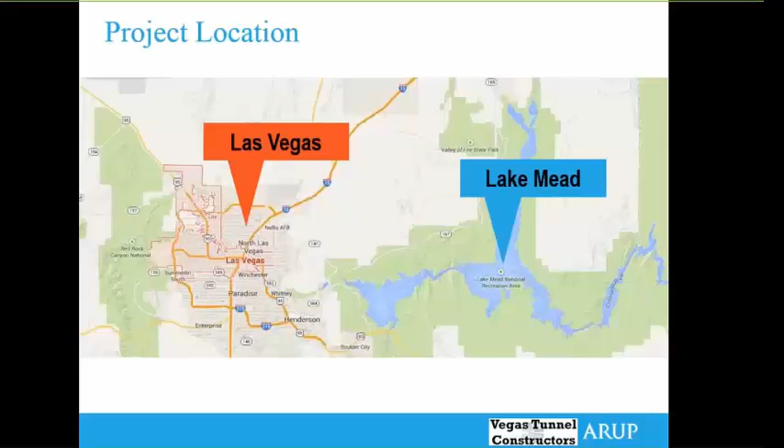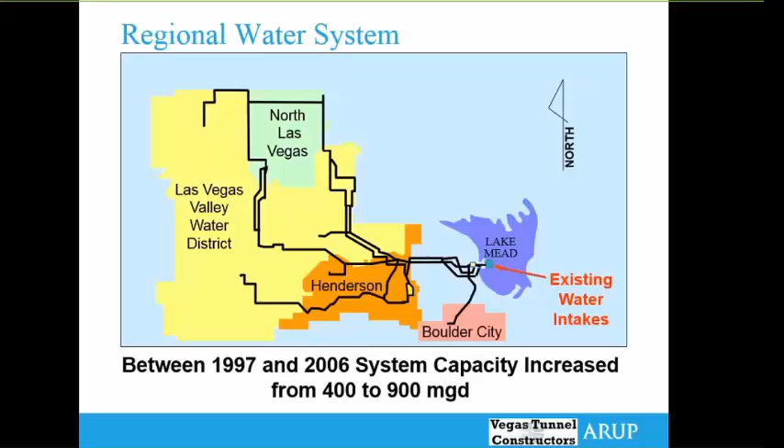Lake Mead is located approximately 35 miles directly to the east of Las Vegas and provides basically all of the water that's used in Las Vegas for drinking water, irrigation, and so forth. The amount of people serviced by SNWA has grown exponentially, and so has the water usage over the years. Between 1997 and 2006, the system capacity more than doubled by the addition of another intake on Lake Mead to deliver water to the treatment plant and into their distribution system.

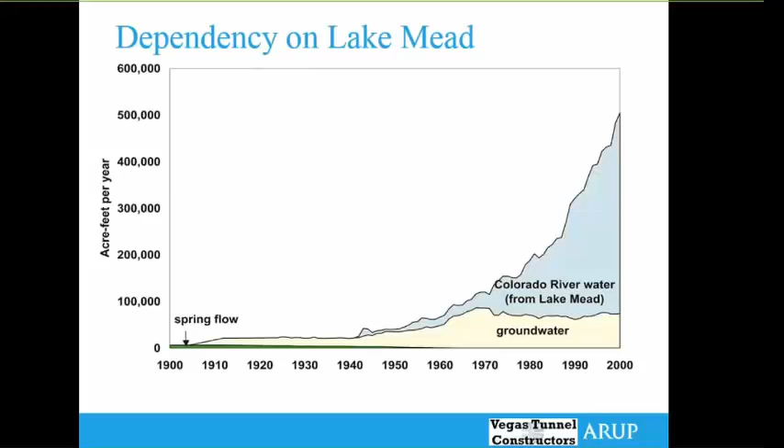This graph shows, over the last 100 years, the dependency on Lake Mead by the city of Las Vegas. Originally, Las Vegas was supported primarily by spring flows and groundwater. However, around 1950, the amount of water provided to Las Vegas by Lake Mead grew tremendously, as you can see in this graph.

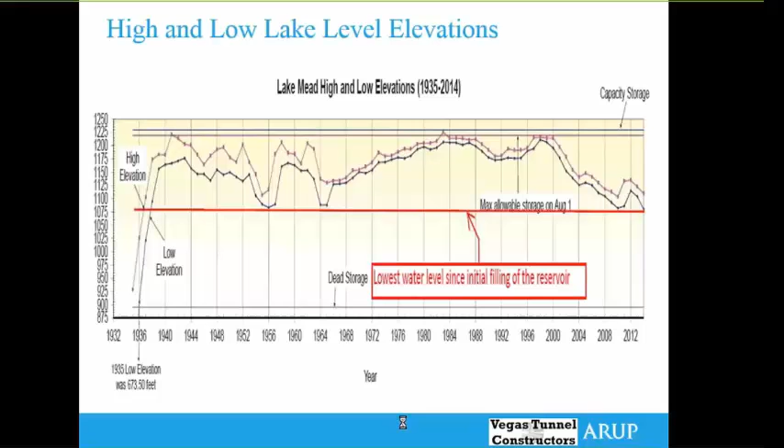So it was a dramatic look forward that SNWA had to come to terms with — the idea that lower lake levels could affect their water intake supply.

Essentially, Lake Mead has two existing intakes. One of them is located at about elevation 1050. What happens is as the lake level drops, you can't continue to utilize your intakes if they're within a certain elevation of the surface, because the amount of debris and material in the top layer becomes prohibitive to actually treat and put into your delivery system.

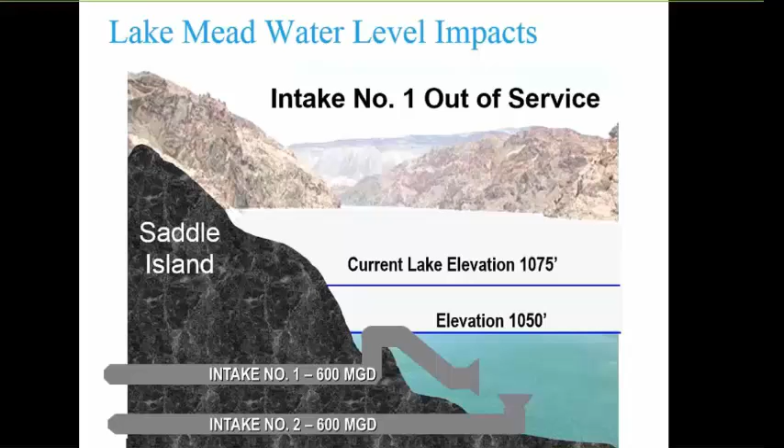Currently, the lake level is at 1075. However, if that were to drop another 25 feet, intake 1 would become out of service, essentially cutting in half the amount of water that SNWA is able to take out of the lake. Another 50 feet beyond that, intake 2 would then go out of service, and the city of Las Vegas would have to resort to very dire measures.

So considering that the lake had already dropped 100 feet by the time this project was initially conceptualized, this was a very realistic look forward, and the Lake Mead Intake No. 3 project was born.

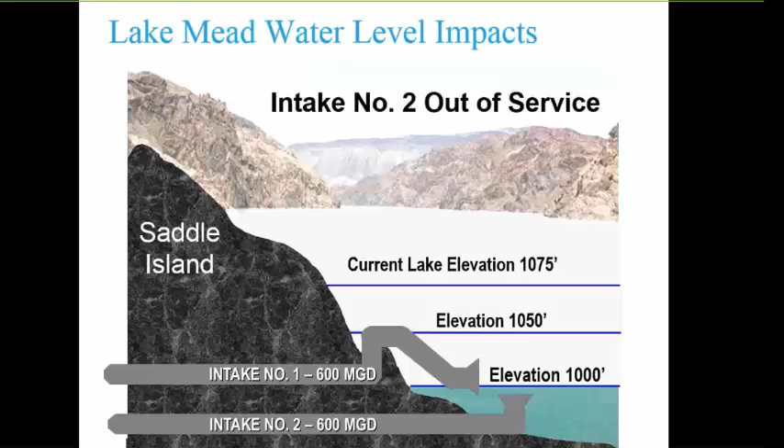The idea behind Lake Mead Intake No. 3 was to add a third intake to the lake at a much deeper elevation, around 860, at one of the deepest locations in the lake.

Not only would this provide long-term solutions to Las Vegas's water resiliency, but putting the intake at the deepest part of the lake means the water quality is higher in these locations, and it would require less water treatment.

The overall objectives of this project are to protect the system capacity, access better quality water at the deeper part of the lake, and prepare for inevitable future drought cycles.

I think we have come to the conclusion that this is not an isolated event, but that we need to look forward to the future and be able to design for these types of things to occur in the future.

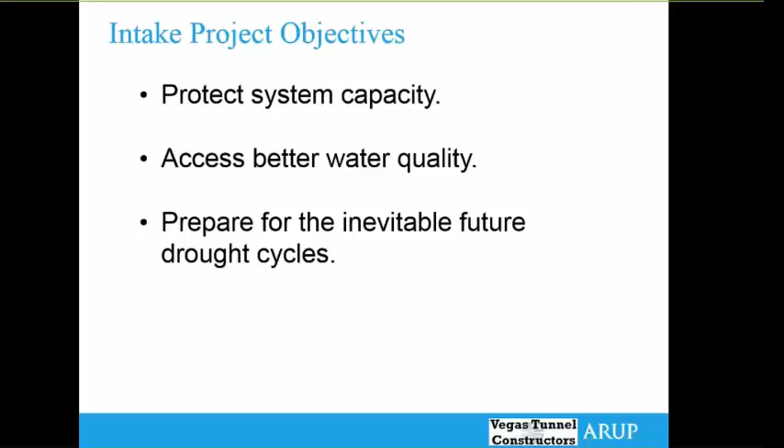The bidding process was a design-build, where qualified firms were first shortlisted, and then final bids were put in and presented, with the combined technical score of managerial experience and price coming together to determine the best offer.

As a design-build, the contract did allow for refinements of the shaft and assembly cavern, the tunnel alignment, segmental lining design, and the final intake connection.

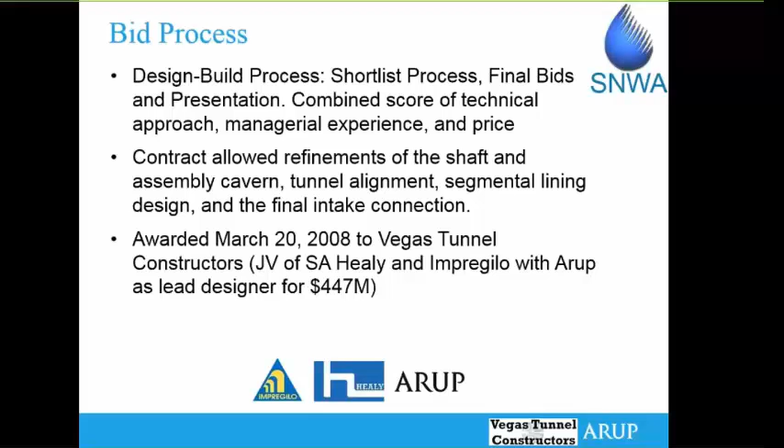In March of 2008, Vegas Tunnel Constructors was successfully awarded the design and construction for a contract price of $447 million. So what I'm going to do is talk a bit about the optimizations that were done as part of the design-build project and get into some of the key aspects.

Initially the project starts with an onshore shaft, which is 30-foot diameter and 600 feet deep, where at the bottom you construct an assembly chamber for the TBM and you launch the TBM out of a starter tunnel.

Then you follow that with a 3-mile, 20-foot internal diameter tunnel that has to be excavated underneath the lake, so that the water pressures on the TBM were up to 15 bars working. At the end of the project, you have to hit a 100-foot tall precast intake structure sunk on the bottom of the lake.

So all in all, a pretty challenging project, pushing the limits of TBM technology and engineering design.

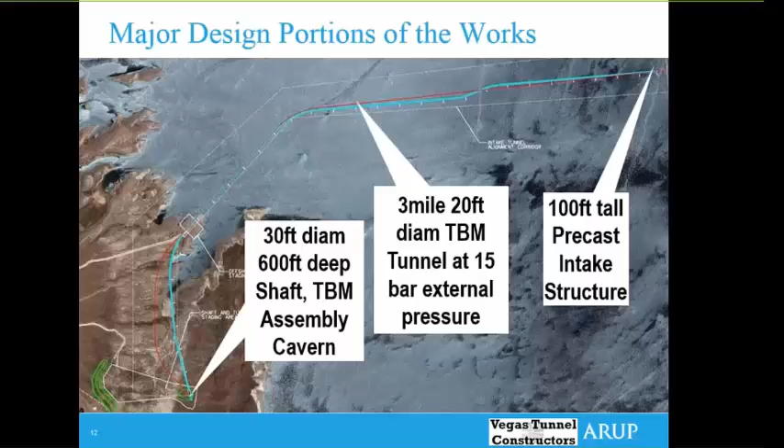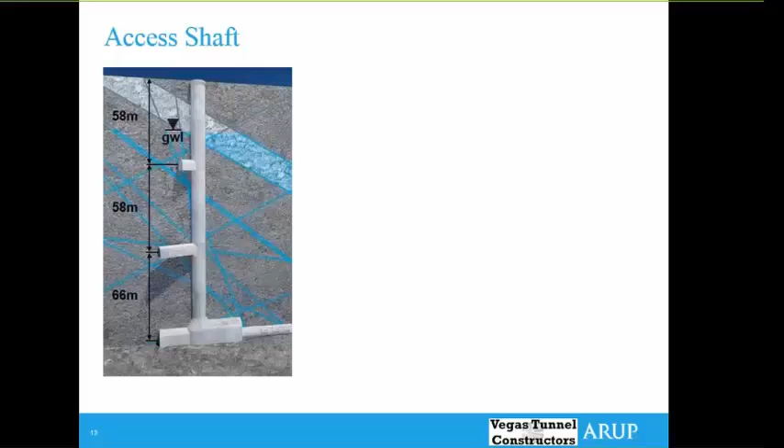So the access shaft, like I mentioned, was about 600 feet deep, and it consists of a couple of different portions: the access shaft itself, a temporary niche tunnel about 150 feet down, and then a secondary connection to the intake pump station 3 that would connect to the rest of the system there.

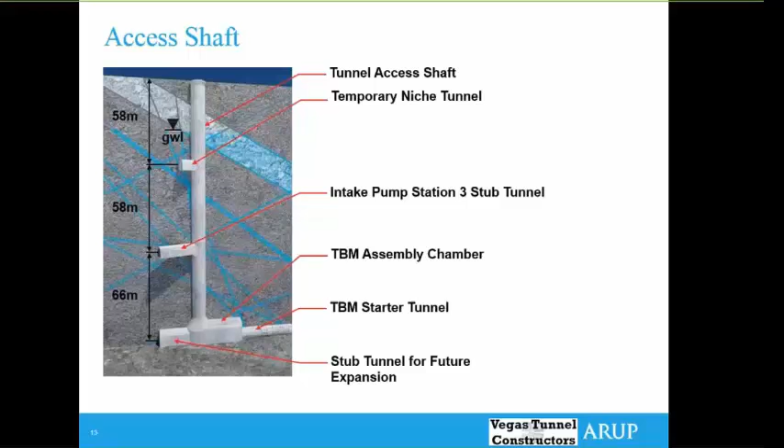The TBM assembly chamber at the base, with the starter tunnel and stub tunnel for future expansion if necessary. So one of the things that we looked at was the geology of the area, which was primarily fairly good rock.

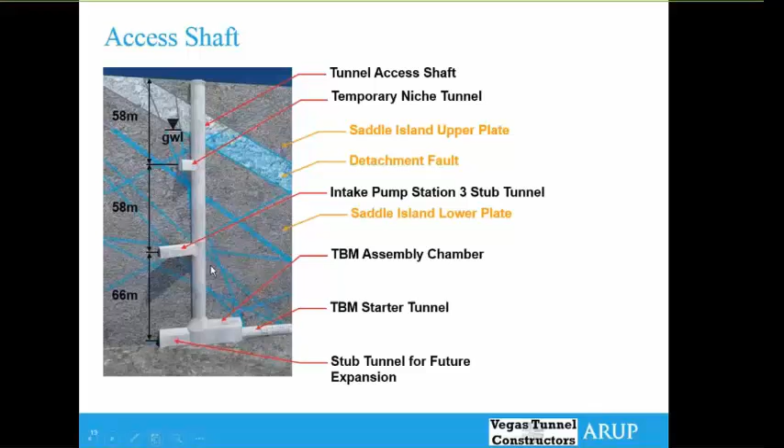Although it did have a large feature of the detachment fault, which separates the upper and lower plate of Saddle Island in the local area, as well as several jointed systems that actually conduct water into the excavation. So the way the shaft was optimized was by adopting what we call a top-down construction method, where essentially you're casting the permanent structure as you go.

The way that works is you would drill out the round, perform a blast that would go ahead and excavate down, usually about 10 feet per lift.

The idea behind the top-down construction was you could map the rock face and install initial support. And because the initial support only needs to provide basically rock protection for the cycle that precedes it, the amount of mesh and rock bolts could be minimized.

Not only that, the shaft was designed to be open for several years, and as such, you don't want to design initial support to last for that long.

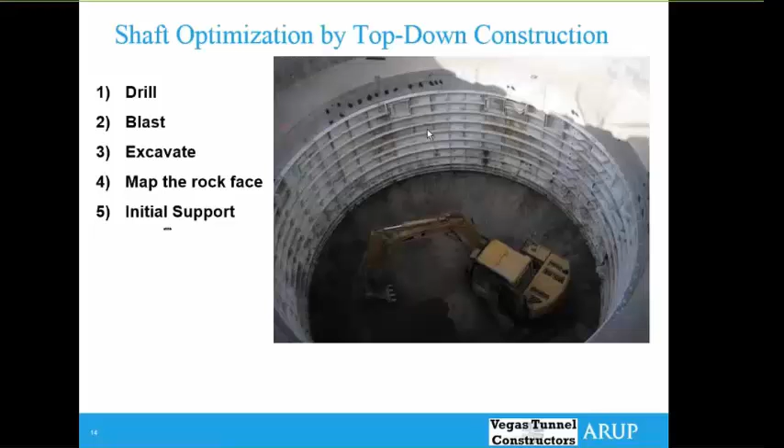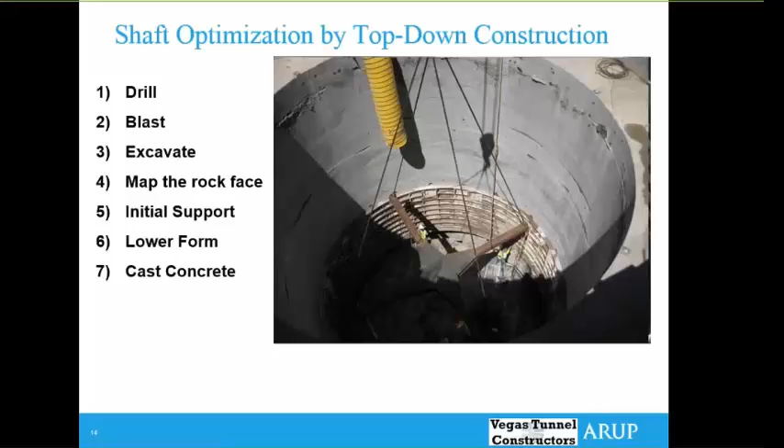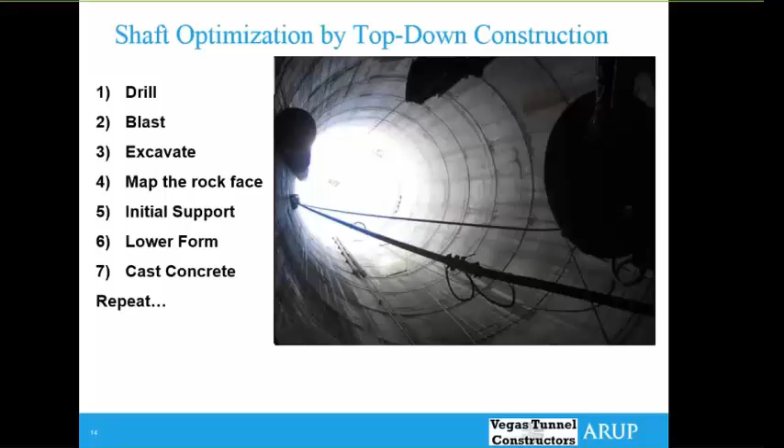After you install that initial support, you lower the form down in place and cast concrete, then repeat the cycle over and over again as you go down. You can see the rings of the shaft and all the lifts associated with it. These are about 10-foot lifts as we went down. Just some more photos here, a little larger for people to see.

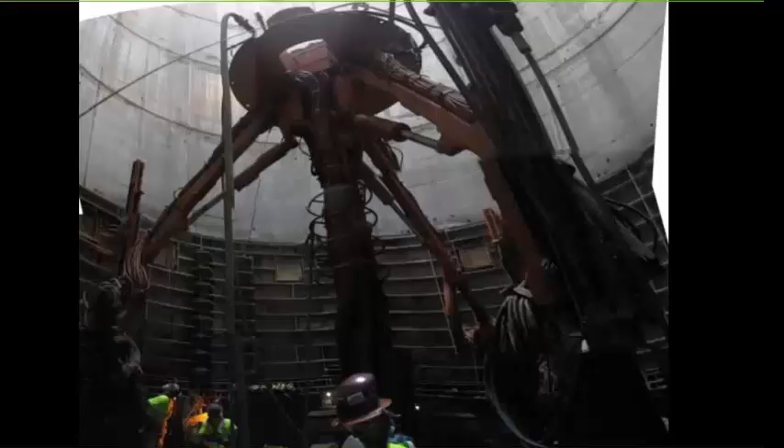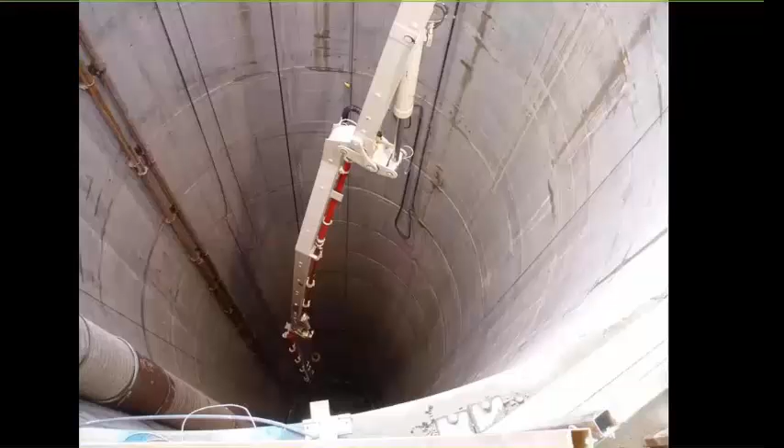This is the form in place, getting ready for concrete. We used a 3-arm drill jumbo Terex system to drill out the round, setting everything ready to blast. Here's another photo showing, I guess about the 7th lift now, and a picture of some of the concreting works with the shaft well underway at this point.

The next thing that needed to be built was the TBM assembly chamber. We specified this as drill and blast construction using a top heading and bench, with pre-excavation grouting where required to provide that water cutoff.

The design was an initial shotcrete lining supported with steel rock bolts. Because we wanted to create a permanent structure as well, this was followed by permanent fiberglass rock bolts and a final shotcrete liner. This allowed VTC to speed up excavation and construction and meet the requirements of the project.

We designed the cavern as a drain structure, since designing it as a tank structure to prevent water from entering the excavation under maintenance conditions would have resulted in a very thick lining. We designed this as a drain structure for structural efficiency, putting weep holes through the lining out into the rock, so that during drawdown conditions the lining would not take the water pressure, which would have been the majority of the load case in this situation.

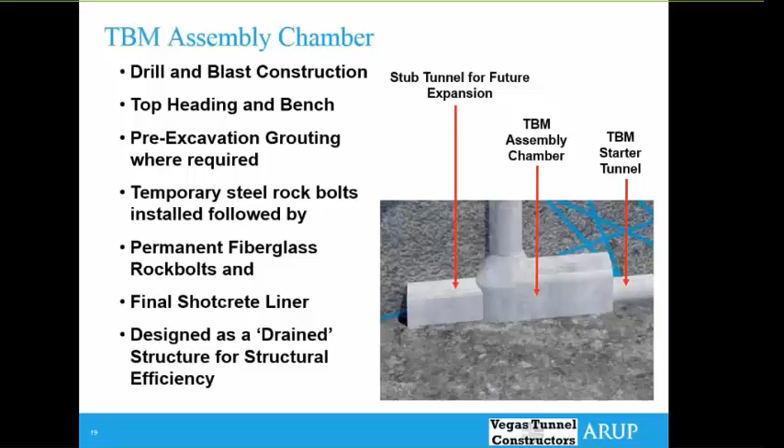So just some photographs of the heading and bench excavations in the cavern. You can see the shaft up in the upper left-hand corner, and the drill jumbo out in front.

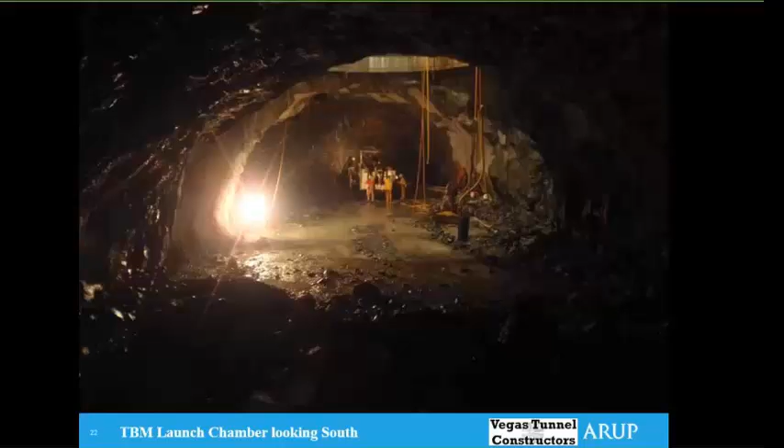Here's a picture of some of the guys on VTC drilling and loading the face, and a shot from the other side giving an idea of the width and size of the cavern. After the top heading was taken, we came back and did the bench, which then ended up looking like this.

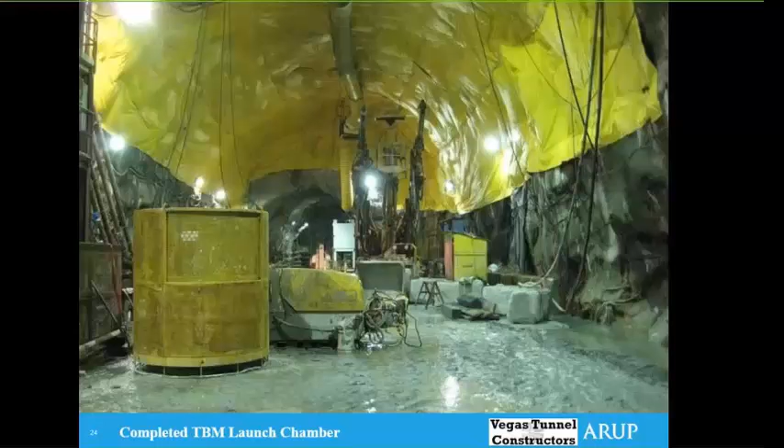Looking back, we strung up some waterproofing to make it a good, clean working area in preparation for lowering the TBM.

Prior to that, we needed to create space out in front of the cavern for the length of the TBM. The TBM is 600 feet long, so it required a starter tunnel to be built.

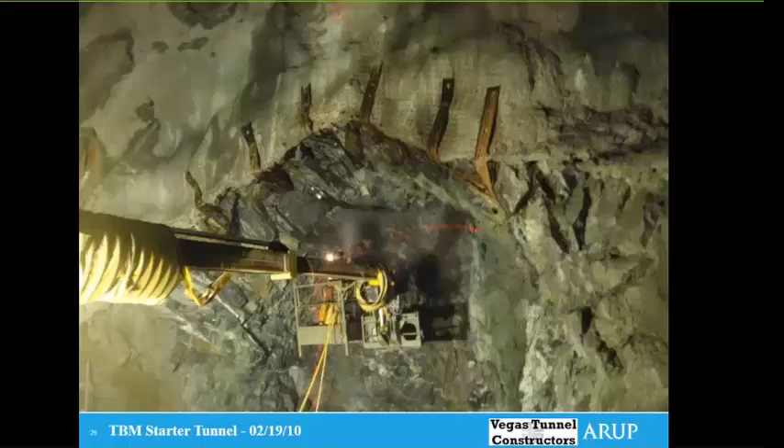Initially, the starter tunnel was in alignment with the cavern. This is a picture from February 2010 of the turning under of the starter tunnel. But within about 4 months, the ground had significantly changed from the expected conditions to material that was not drill and blast type, but more a fault gouge material requiring excavation with a bucket excavator. You can see in this photograph the excavator had come up previously to the front and taken out a bit.

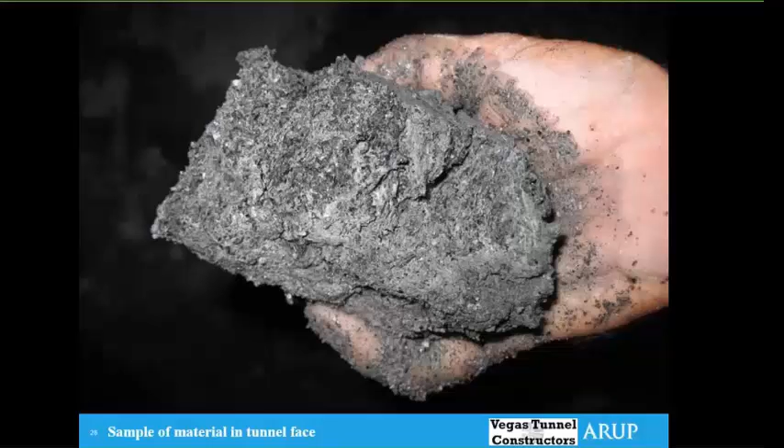Fast forwarding over the next 6 months, this starter tunnel was not successful and had to be abandoned, and a new starter tunnel had to be built. This is a sample of what some of the material in the face looked like — a mylonitized amphibolite, basically almost like a fault gouge. You could easily break it with your hands.

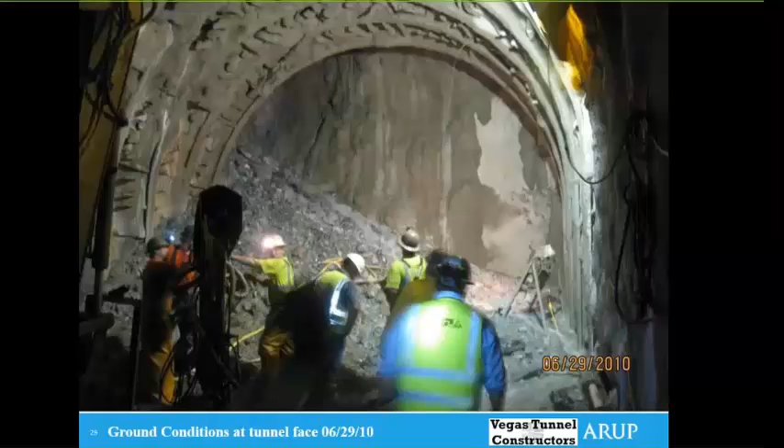So, as I mentioned, the starter tunnel was not successful and was abandoned, and a new starter tunnel begun in February of the following year, using drill and blast with pipe canopy, steel arch forms, and shotcrete.

This photograph shows the pipe canopy coming over the top of the tunnel. The design was very robust since we only had limited rock information due to the horizontal coring done prior to the start of this new alignment, and we needed to be prepared for almost anything the project could throw at us.

SNWA were fairly adamant that the solution had to be robust enough to handle anything, because they were on a bit of a time crunch in terms of the water in the lake continuing to lower over time, and the need for this project to come online to provide redundancy to their system.

So this was the approach adopted to perform this starter tunnel. Some neat folding of the face was encountered. We did encounter some fault planes and some interesting features as we went along here.

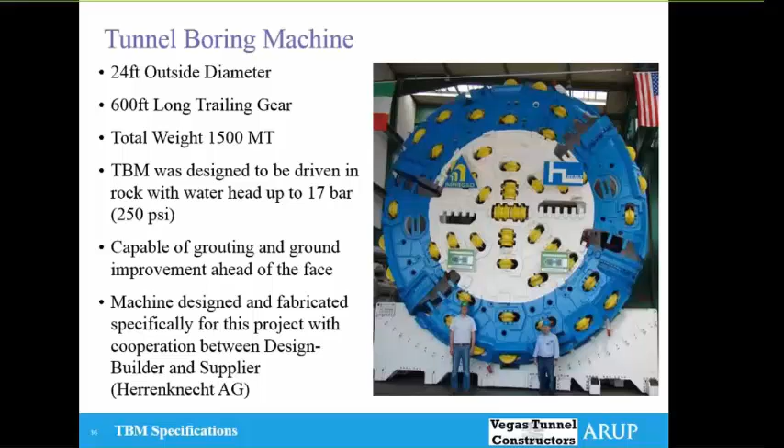The principle selected for the project was to have it operate in a couple of different modes. Where the rock is very fractured and communication with the lake could be expected, the machine was designed to operate in slurry mode with a traditional slurry circuit. However, there were portions along the project where the ground had a permeability that was fairly low and could allow for open mode excavation.

To allow for this, the TBM was designed essentially as a hard rock machine, but with a long horizontal screw conveyor that went down through the center of the machine, in order to allow the materials in open mode to be basically evacuated onto a conveyor belt and taken out to the shaft.

Here's a picture of the TBM under partial assembly on the surface. The TBM was partially assembled after being commissioned and shipped from Germany, lowered down effectively in pieces, and fully assembled in the cavern prior to being pushed forward.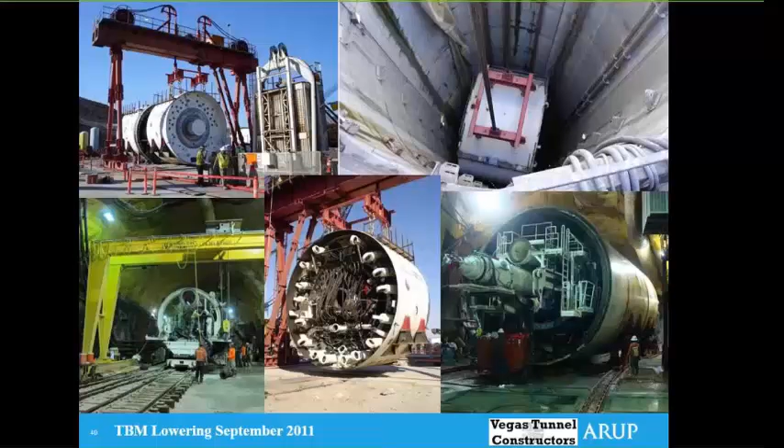Here's a picture of the TBM. Her name is Kokopelli, which is the Hopi god of rain.

You can see her being pushed forward here on some ALE jacks, being slowly pushed into place and getting ready for launch.

Just as a review, the launch location was over on dry land in the purpose-built shaft and cavern. The overall alignment has the tunnel coming out and turning to the right to avoid some of the volcanics that were encountered in this area during the initial drilling program and ground investigations.

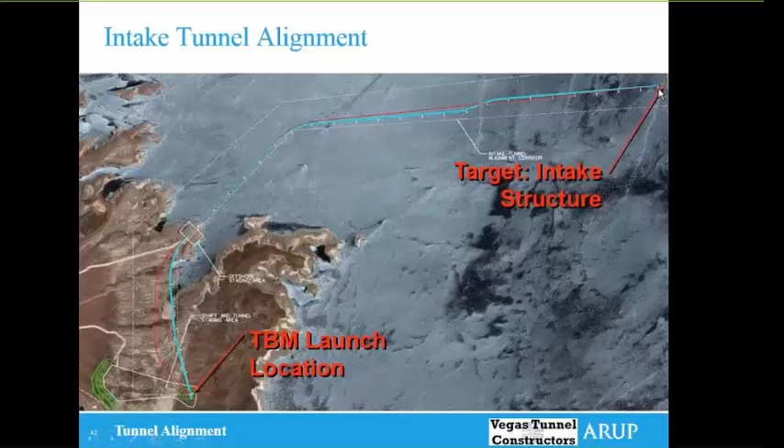The alignment continues out underneath the lake before turning right again and heading straight out toward the intake structure location.

This is basically a profile showing some of the geology of the area. The tunnel is approximately 3 miles, and it starts out on a very low 1% slope before getting underneath this very deep feature, which is the Las Vegas Wash.

This is basically the wash area where all of the previous water that would drain from the Las Vegas Basin would dump into the Colorado River. This feature essentially limited where our alignment had to go, to safely pass underneath at this location with enough rock head to prevent any type of instability of the tunnel face in this area.

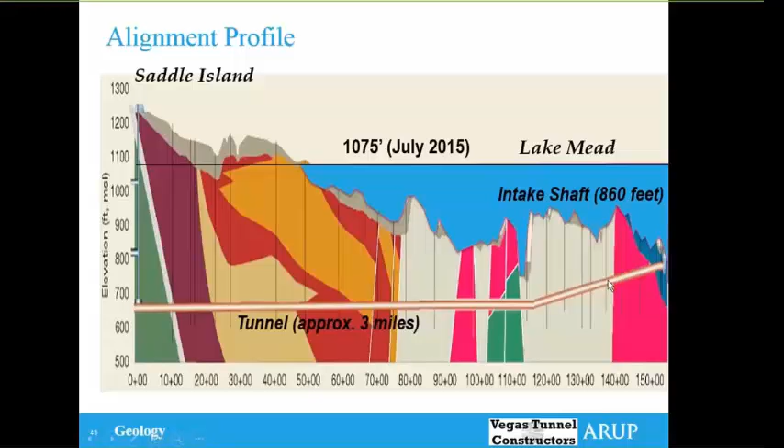After that, it continues at a 3% grade to the intake itself.

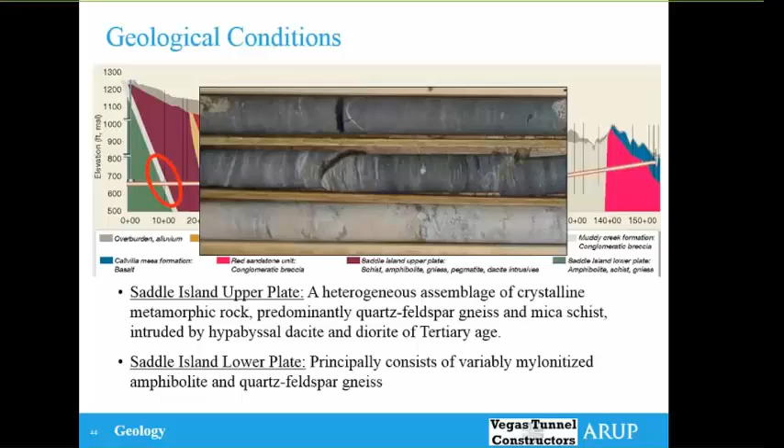Some of the geologic conditions encountered along the project: I talked first about the upper and lower plate of Saddle Island, which are two distinct types of rock. The upper plate is essentially a quartz feldspar gneiss with mica schist, and the lower plate has some pretty hard mylonitized amphibolites. The upper plate was very brecciated and required us to essentially mine always in closed mode.

The next major feature was the Muddy Creek Formation. This is a conglomerate, basically a sandstone and siltstone, that had varying levels of induration or cementation. This was mainly the material that could be excavated in open mode because of its weak behavior. It actually has the ability to heal itself and didn't exhibit a lot of groundwater inflow, in fact nearly none.

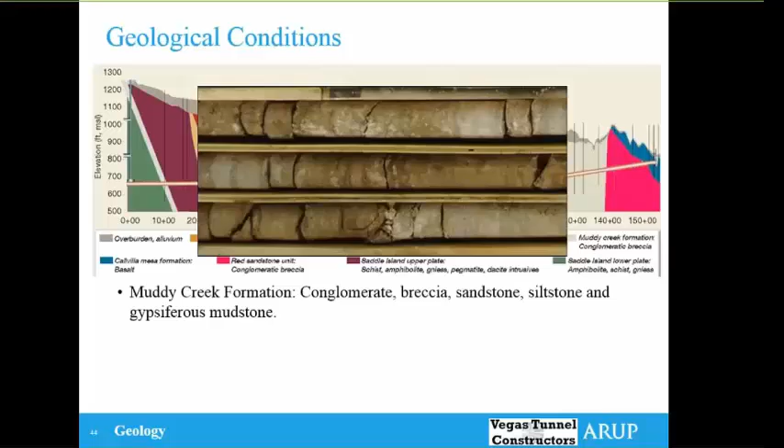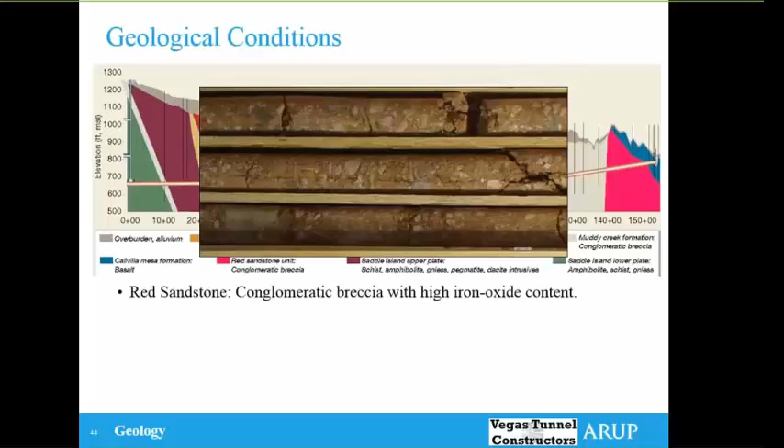The next major geologic feature was the red sandstone. Again, this is a conglomerate, but had a higher amount of iron oxide. This was a softer rock material that was actually able to be mined mainly in open mode as well. And then you have the Las Vegas wash, again, in this area.

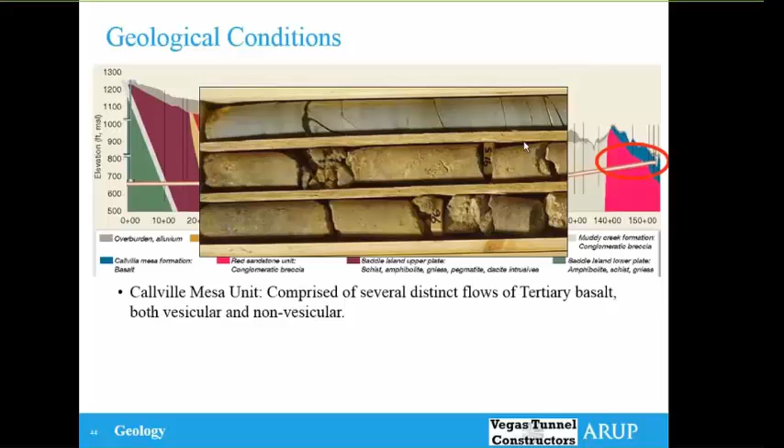And you always save the best rock for last, right? So the finished area around the intake was actually tertiary basalts, both vesicular and non-vesicular. So you can imagine at the end of the project, you're mining into material that has pathways that can directly communicate to the lake. So you have high pressures that will be active at the very end of the project. And this last part was mined again in closed mode.

So a bit about the precast segmental lining, which was my main contribution to the project. The precast lining was cast at a purpose-built facility about 35 miles from the job site, and we used traditional reinforcing for these with 6,000 psi concrete and 80 ksi yield strength steel.

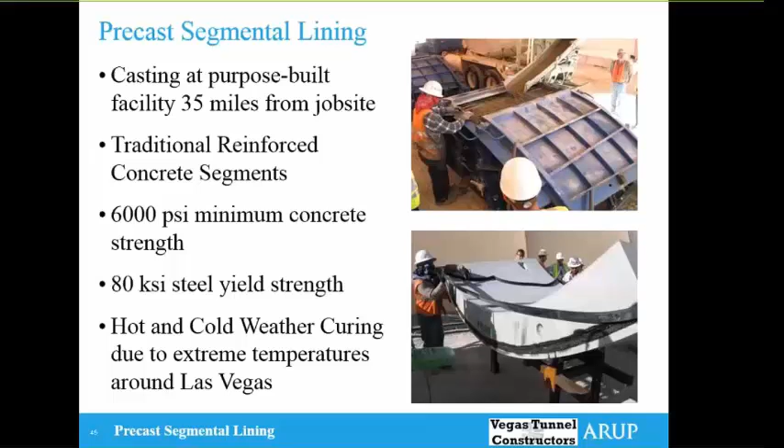One of the interesting things about Las Vegas is that most people associate it with being very hot, but in fact it can get extremely cold in the desert, and we did actually have snow at the job site once over the course of the project. So both hot and cold weather curing needed to be considered due to that large temperature swing of the Las Vegas region.

Now, one of the interesting things about the project as a designer is that essentially you normally design segmental linings where they have very low axial forces but very high bending moments, especially for soft ground areas. And so normally you'd see a clustering of the design cases out around this area.

But in fact, on this project, it was quite the opposite. What we saw from the use of our closed form spreadsheets, our beam spring models, and our structural modeling was that, in fact, the majority of the load cases resulted in extremely high axial loads up to the limit of the capacity of the segments with actually very low bending moment. And primarily that had to do with the high amount of water load and the deep nature of the tunnel.

We used a variety of tools to analyze the lining, and all of them really do have their place, even in modern engineering. We used everything from closed form spreadsheets to beam spring models, some fancy structural modeling software, and some ground modeling software. But you can always use these to basically calibrate yourself and cross-check to make sure that you're getting the right behavior out. I can't stress enough to young engineers that you don't want to always just jump to the neatest looking tool that produces nice colors to go ahead and do your structural analysis.

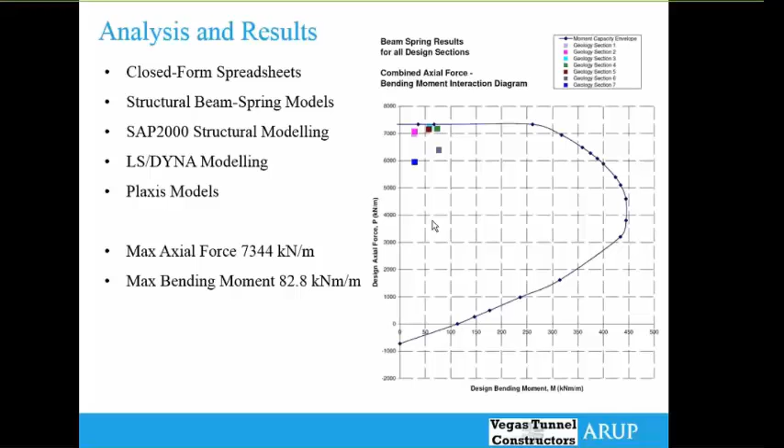So due to these high axial loads that were going to be induced on the tunnel lining, there is a phenomenon called bursting that is present in the joints, which basically causes catastrophic rupture of the concrete.

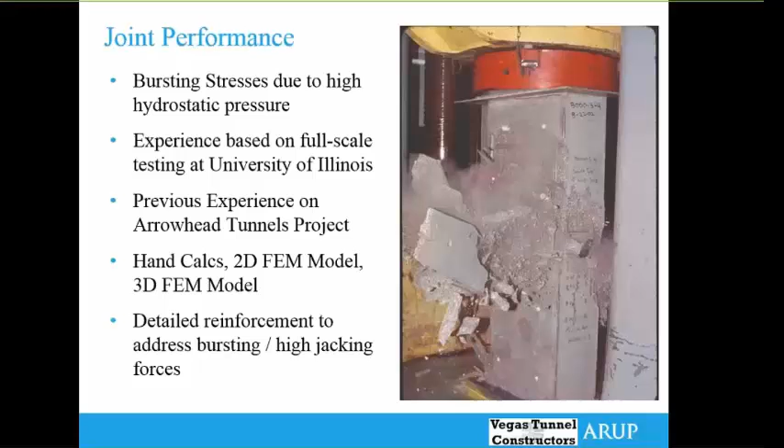And it was a similar process for the jacking forces that we used to design out these segments. Some pictures of the segments delivered to this job site here. The segmental lining is a 5+1 system with some interesting dowel connectors between it and bolts, both radially and circumferentially, to hold the system together.

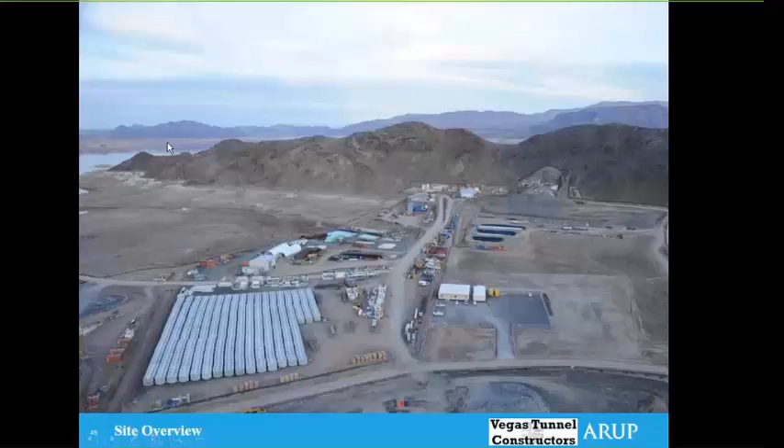A picture of the job site here, basically showing the segmental lining yard and the shaft up here in this location, followed out by going ahead, and the tunnel basically traversed the saddle island here, and then going out, with the intake being somewhere out in this general area. So that said, I think I would like to talk a little bit about what I think is the most interesting part of this whole project, which is the intake structure.

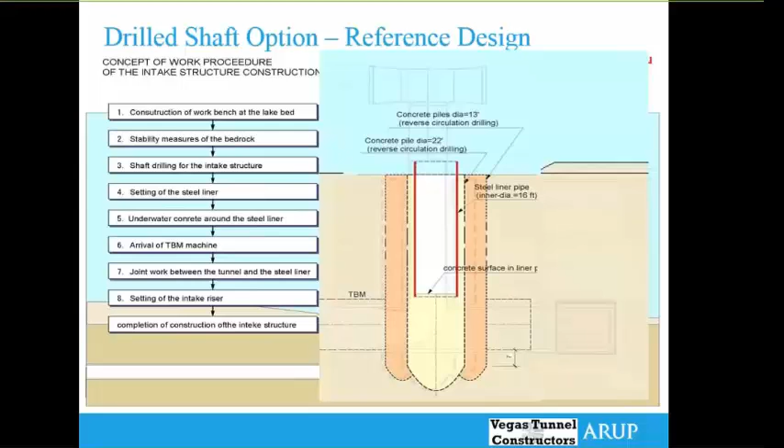This is a design-build project, and only a few ideas were presented during the bid phase and RFP that were available to be reviewed. The reference design had an approach previously used on one of the previous intakes: ahead of the TBM arriving, you would drill down into the lake bed, embed a steel pipe, perform backfill concreting operations, and put in concrete piles below the lake to ensure a water cutoff. You would then drive the TBM past this steel pipe and very carefully excavate upwards into the steel lining, finally making the connection to the intake.

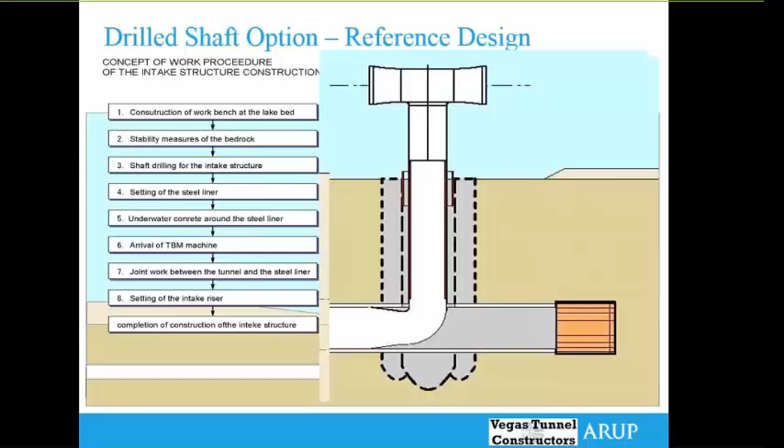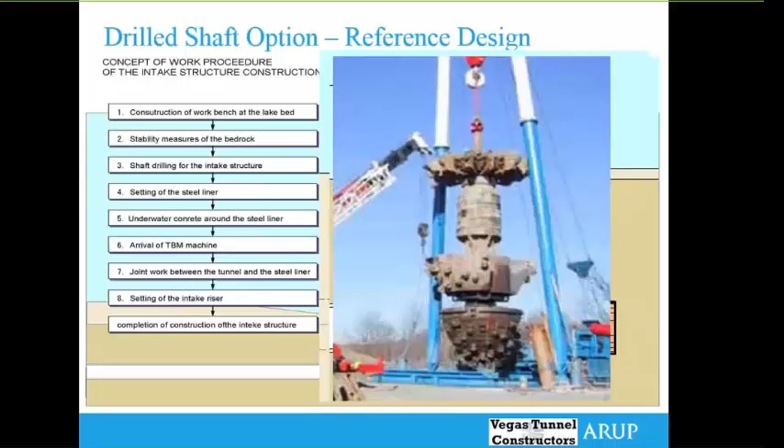This was not only difficult to foresee how it would be constructed, but it included some very inherent design and construction risks. You can imagine this is at the very end of the project, and you're exposing people to potentially very high pressures right at the end. It would also require specialty drilling rigs to perform this type of work, and probably hard hat diving and other things that, as designers, you want to avoid.

So the solution presented by the VTC Arup team at bid was to move away from drilling on the bottom of the lake, and instead excavate a large pit. You could take a steel elbow, embed it on the bottom of the lake, then drive your TBM into this intake and dock it. This would prevent any underwater hard hat work or exposing workers to high pressures, because the TBM itself is designed to address these high pressures.

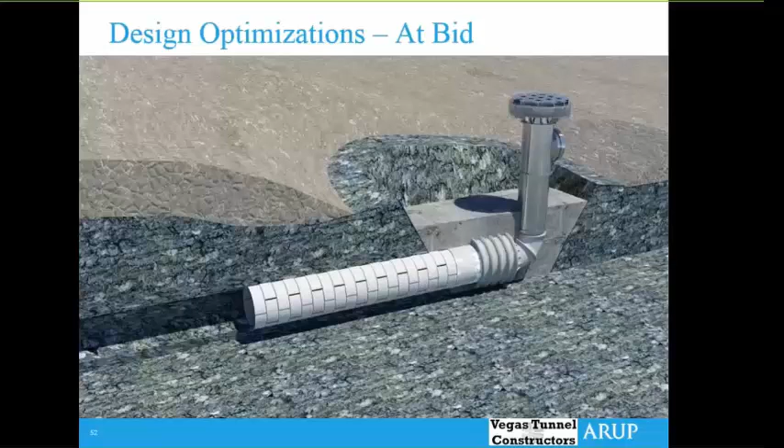So at bid, we designed this as a 100% stainless steel structure. However, as we progressed in design after award, we started looking into the use of precast concrete. And in fact, that's what we ended up using: a large precast base followed by a stainless steel riser pipe and the intake screen.

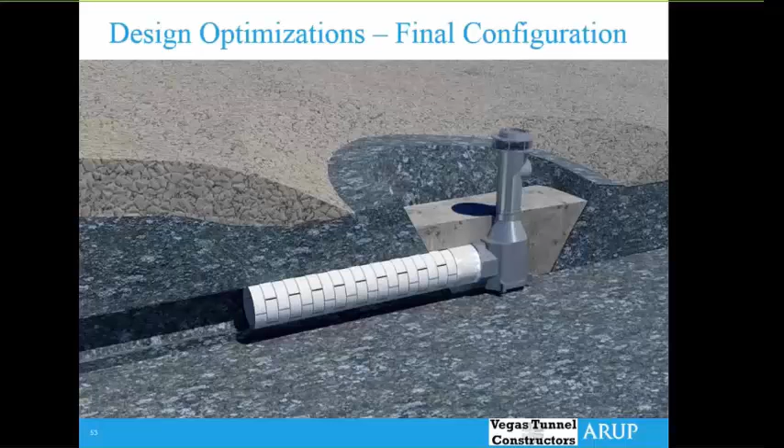The advantage is that the underwater excavation and installation of the intake structure occurs well before the arrival of the TBM. This takes it off the critical path and reduces time by having it prefabricated on a specialty built barge. The entrance allows the TBM to come into the structure and do dewatering in a controlled way. If you detect leaks, you can seal those defects before trying to draw down the water and see if the sealing was effective. This reduces the amount of activities both at the riser site and on the lake surface.

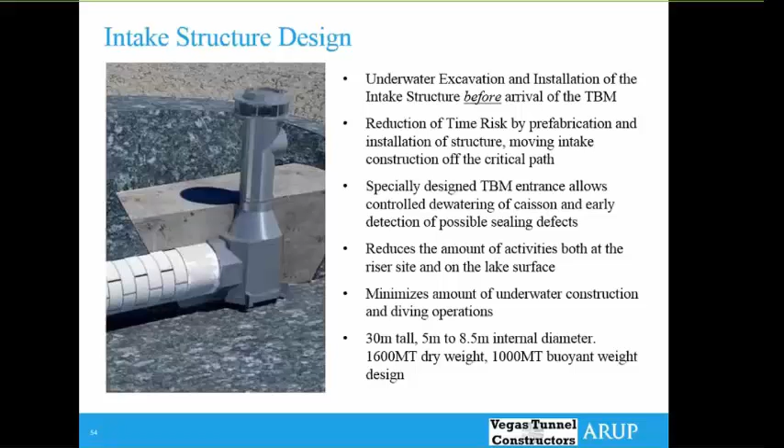It minimized the amount of underwater construction and diving operations, and in fact no hard hat diving was required. The intake is about 100 feet tall, 8.5 meter internal diameter, weighed 1,600 metric tons, and had a buoyancy weight of 1,000 metric tons, which is important because we ended up using that approach to do the construction of the intake.

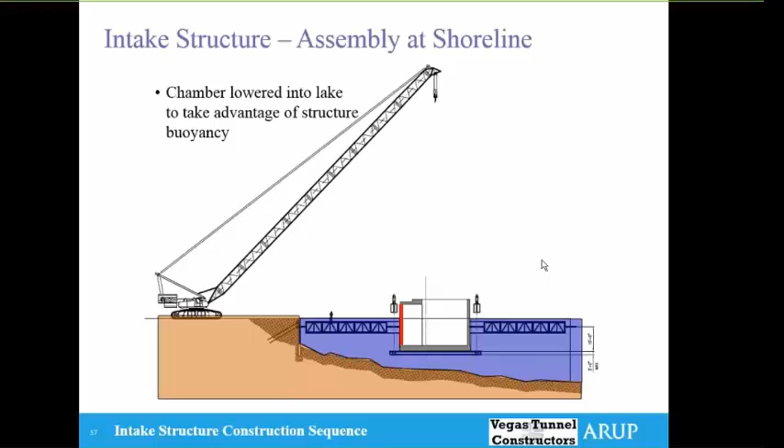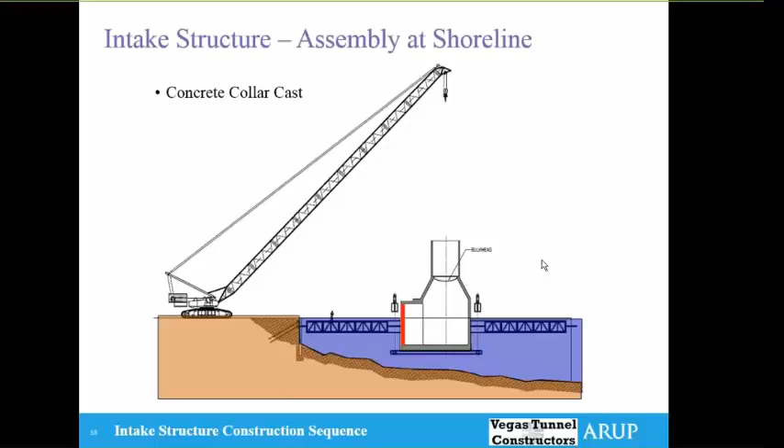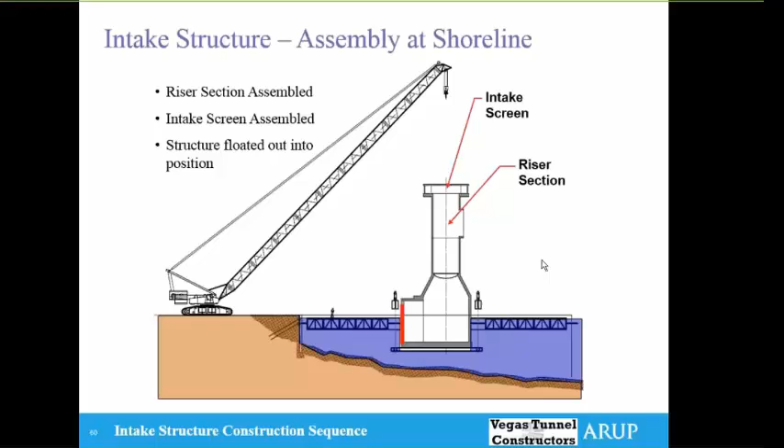We then lowered the chamber into the lake to take advantage of that structural buoyancy and help reduce the loads on the barge. Next, the top of the chamber was cast, followed by placement of the concrete cast collar, and then finally the riser section was assembled, along with the intake screen. Essentially, the structure was floated out into position and ready to be sunk on the bottom of the lake.

Here are some photographs of the intake structure as it was being assembled, with some pretty heavy reinforcing of the exterior structure, designed by our Houston office. Essentially, we borrowed a lot of technology from the offshore oil business to look at how we could design this thing. They have gravity structures that are common practice in their field, and we borrowed heavily from that in the design and fabrication of this intake structure.

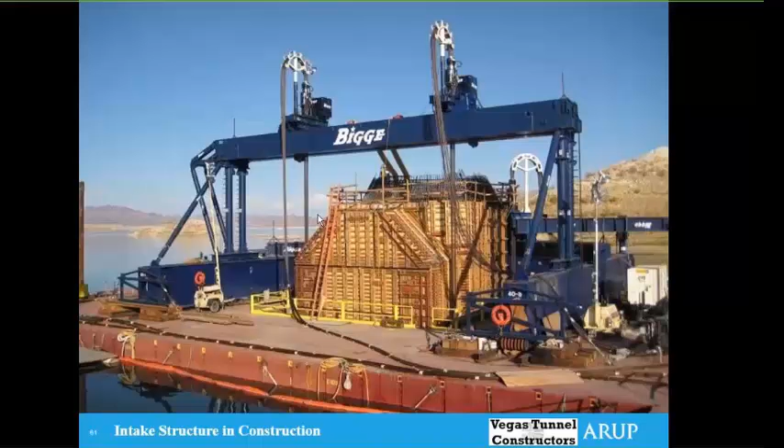You can see in the front here, these are glass fiber bars. This is the TBM soft eye. So forming up and getting ready for casting of that initial chamber.

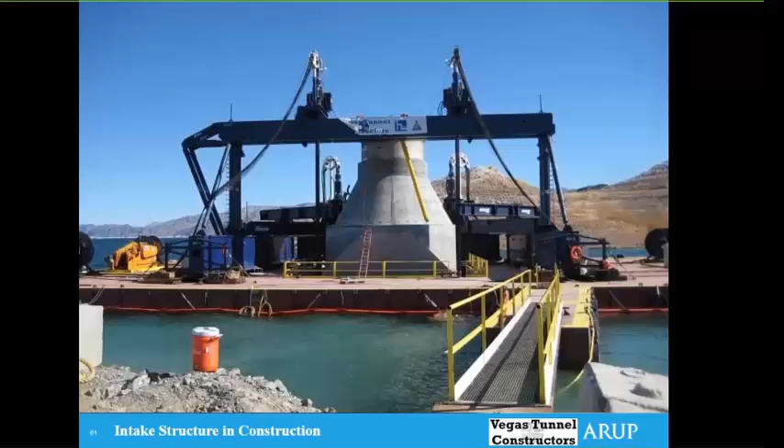I have to give great credit to Vegas Tunnel Constructors for their work on this, figuring out the staging, the concrete mixes, how they were going to get everything formed and put together. As engineers, it's easy to put things on paper, but some of the real challenges come in building the project.

It was quite a sight to see how all this came together, and you can see the intake structure itself here, getting almost ready to be floated out.

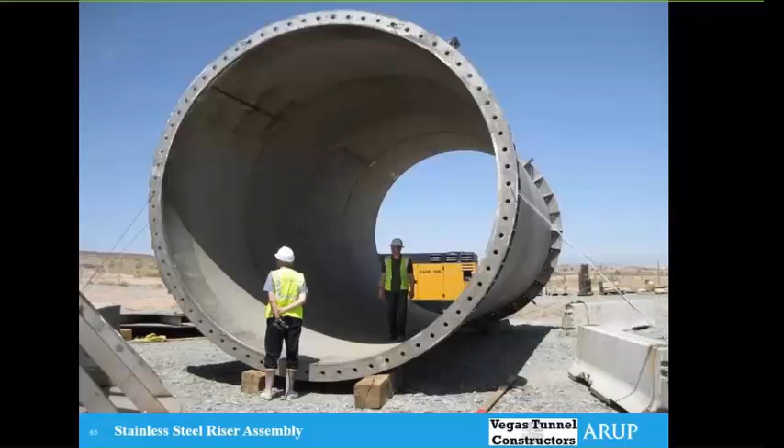This is a section of the stainless steel riser and the intake screen. And if you'll notice over here on the left-hand side, there's actually the bulkhead - a stainless steel bulkhead that would be put into place inside of the intake structure in order to provide the final plug.

Really quickly, I'd like to talk about how we did the excavation at the bottom of the lake. Basically, there was about 6 inches of silt on the bottom of the lake, followed by 6 feet of old desert soil before getting down to rock.

And that rock required actually blasting, underwater blasting, that was done from a crane barge, and then essentially using an airlift to excavate out the material that was blasted at the bottom of the lake.

So essentially the way that this was done was blasting using shaped charges, where an explosion throws an ingot of iron and steel down onto the rock, effectively cracking it, breaking it apart, and allowing the excavation to occur.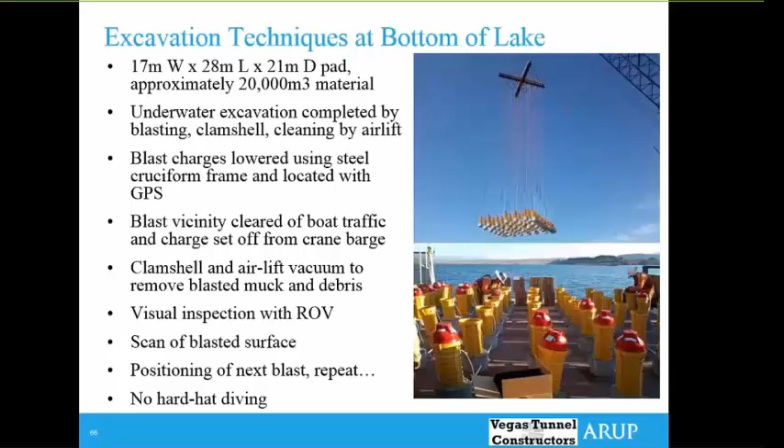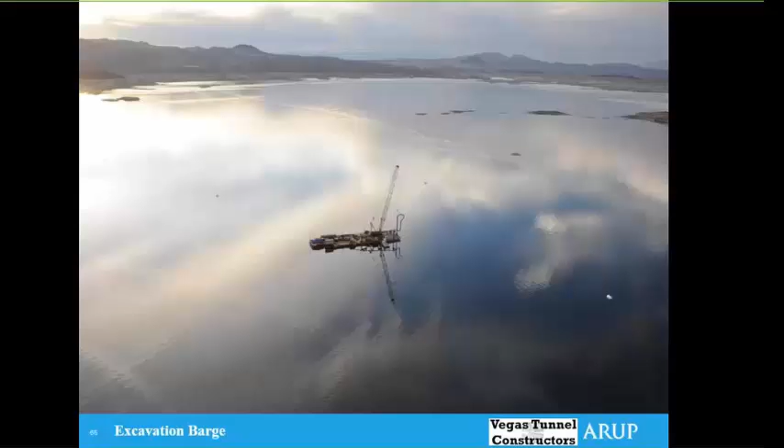And it's important to mention that it wasn't required to actually remove the excavated material from the hole - there was an allowance for the spoil material to basically be stacked up on the bottom of the lake.

So essentially this is the scan of the final excavation. You can see here in the middle of the screen the actual excavated surface, as well as the spoil pile here at the bottom of the lake.

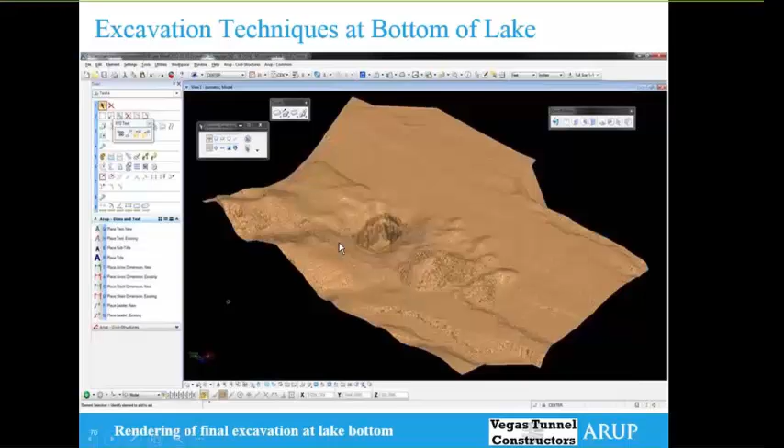And so all that needed to be done now was to take a 100-foot tall precast concrete structure, float it out, and put it exactly in position.

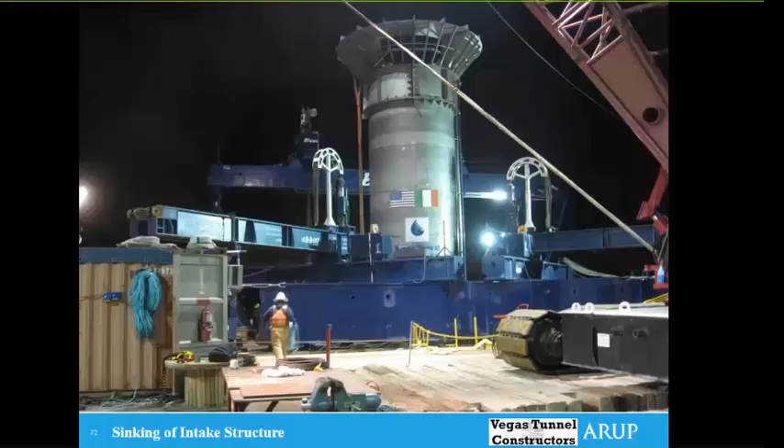So here's the final assembly of the intake, followed by operations of floating it out and into place. And it was lowered using these very large, long strand jacks on all 4 sides, lowering it down into place. This again required some pretty intensive marine engineering work by VTC to get it exactly into place and put down into position.

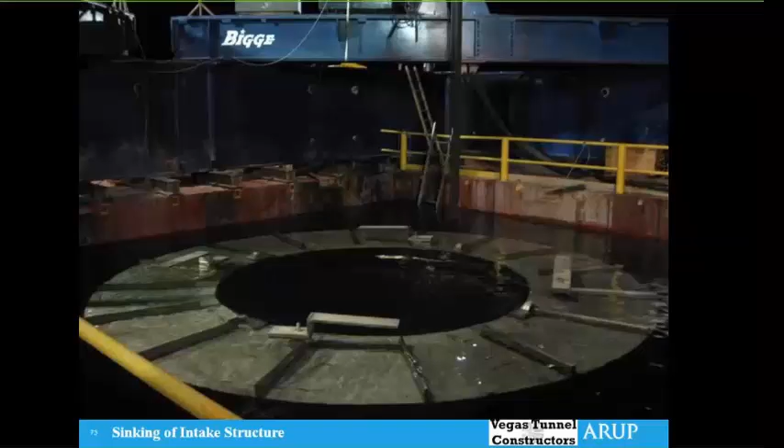Here it is going under, probably one of the last times it'll ever be seen by humans - until the TBM arrives, at least.

And then followed by the Tremie concrete operations. This in itself was an incredible thing to do, with basically an on-site batch plant being built, and then concrete trucks literally being put onto barges and pushed out to the middle of the lake, where they basically dump out of their chutes onto a conveyor system, and effectively this big arm here is the Tremie concrete operation as it goes underway.

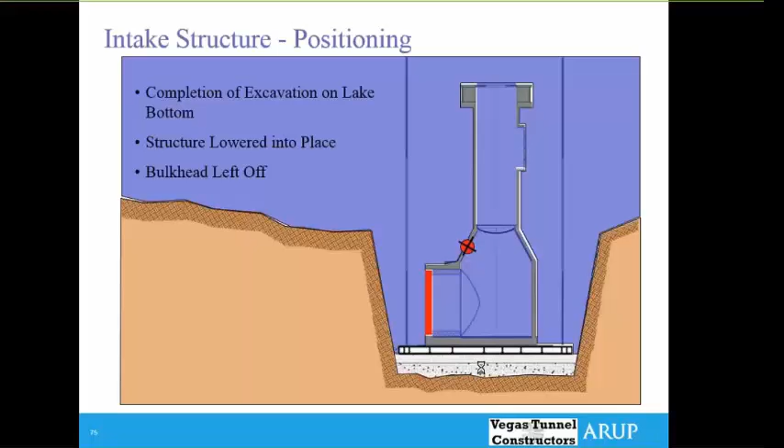So just a little cartoon as to how all this came together. After completion of the excavation on the lake bottom, the structure was lowered into place, and the bulkhead, where I mentioned before, was left off. The bulkhead sits in this region right in here.

The Tremie concrete was put into place, and that Tremie concrete was about 14,000 cubic yards, just to give you a comparison as to what I was looking at here.

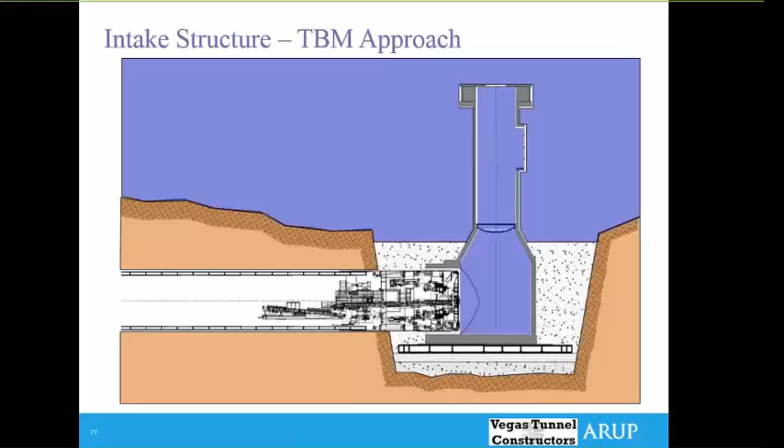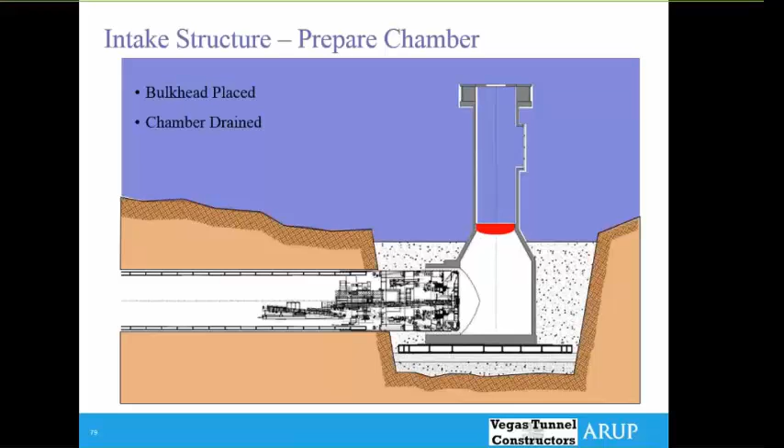Next, the TBM approached and was slowly guided into the intake. After the TBM broke in, the bulkhead was put into place, and then the chamber was drained. Again, this allowed all these operations to occur without any manned entry, without exposing any workers to any high pressure conditions.

Next, after the final connection was made, and we were assured that there was no leaking, we went ahead and the TBM was essentially disassembled, and a final concrete lining was put into place.

Currently, the chamber is being flooded, and then once the pressure is balanced between the TBM, between the outside and inside, then the bulkhead basically comes right off.

So just to animate that one more time, after you have equal pressure on both inside the tunnel and at the lake, this bulkhead just essentially will come straight off.

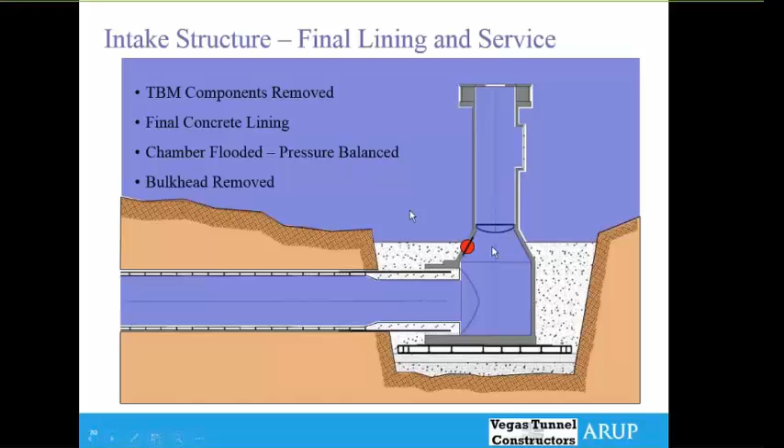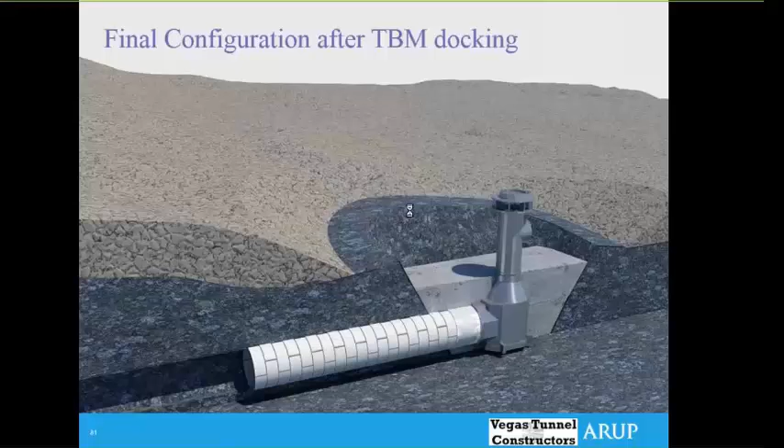This is again just another rendering of the final intake after the TBM has been docked. But I'm sure everybody wants to see the photographs and the proof.

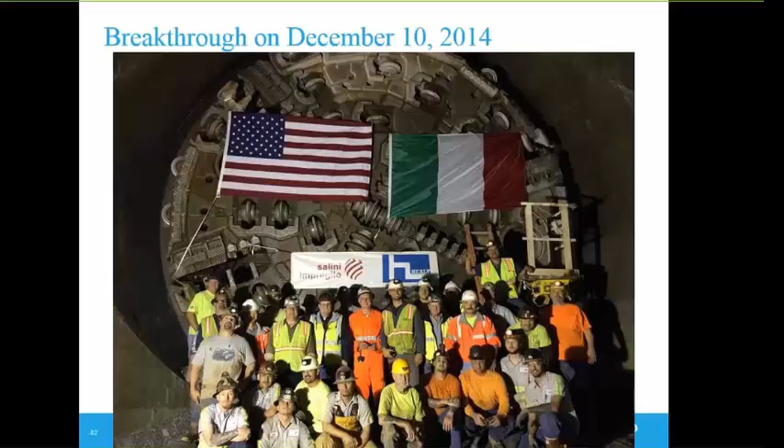This was a photograph of the breakthrough on December 10th, 2014. Some of the most important people of the project are in this photograph: Jim Nickerson from VTC, Renzo Ciccato, the construction manager, Claudio Cimotti, the senior tunnel engineer on the project, as well as a whole other cast of characters that all came together to make this project successful. Really, these are the guys that built the project and made it happen.